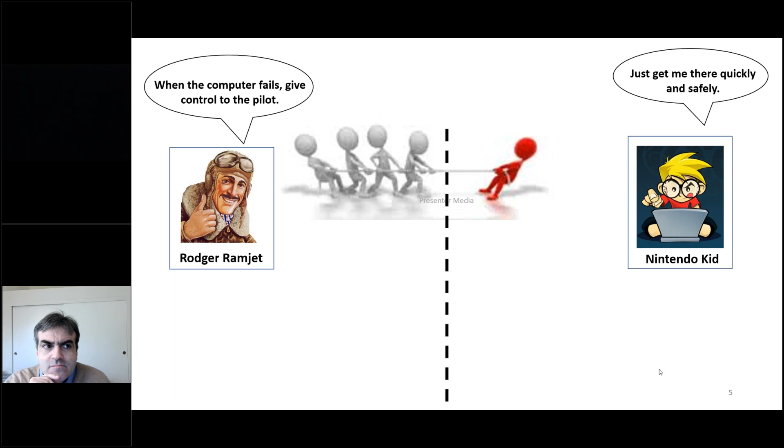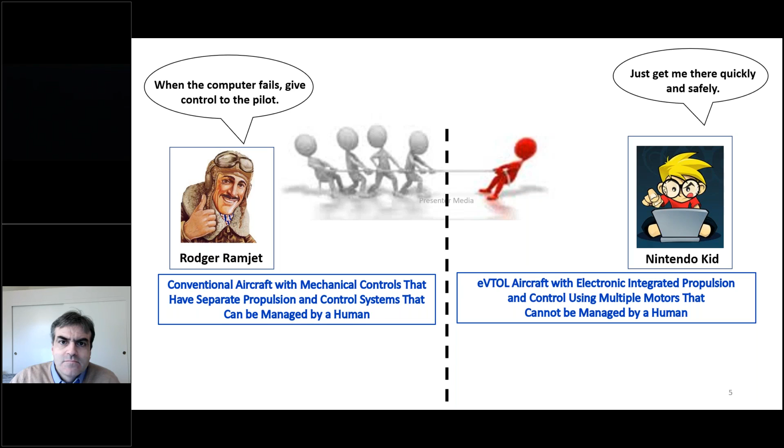Now, the Rodger Ramjet aircraft has mechanical controls, or fly-by-wire controls that mimic mechanical controls. There are basically separate propulsion and control systems that are managed by Rodger. For the Nintendo kid, we're talking about a new set of aircraft that have integrated propulsion and controls. It could have multiple motors, rotors, etc. And more often than not, they just can't be managed by a human—there are just too many things to move.

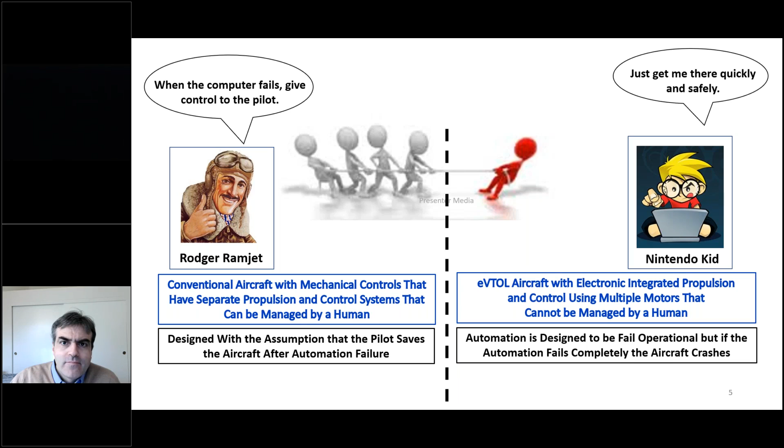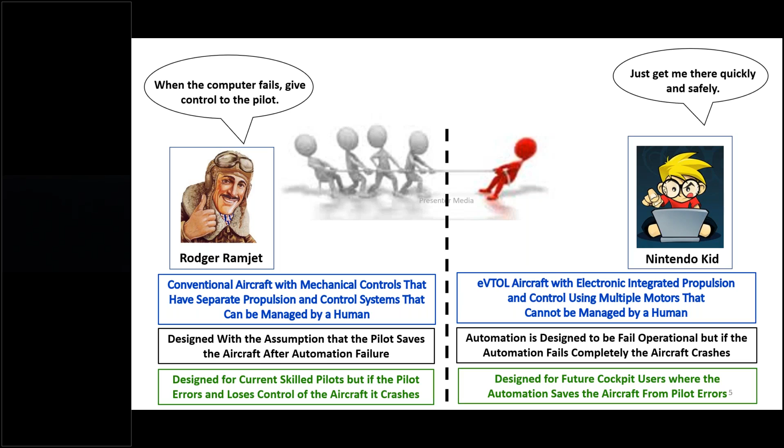In Rodger's aircraft, it's basically assumed that the pilot will save the aircraft after the automation fails. In the Nintendo kid aircraft, the automation is designed to fail operational. So if the automation fails completely, essentially the aircraft crashes. On the Rodger Ramjet side, if the pilot messes up, then the aircraft crashes. For the Nintendo kid, the aircraft features are designed so that the automation can save the aircraft from pilot errors.

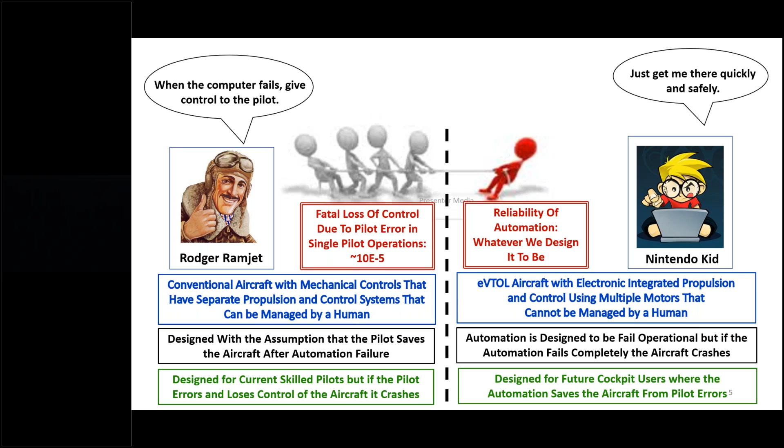One of the things we looked at was that in general aviation single pilot operations, the pilot has a failure rate of something worse than 10 to the minus 5th for loss of control accidents. On the automation side, we can design the automation to whatever we want it to be. It can be boiled down to basically a cost versus functionality relationship. So an interesting implication falls out of this if you think about it: if we want to improve safety beyond what a single pilot can provide, then we have to move past the philosophy that the pilot backs up the automation.

Al, one thing that I'm seeing on my screen is that I've got a green box. I'm not sure if it's cutting off the bottom of the slide or not. Is that a problem?

I think we can see everything. Okay, yeah, I can see everything. That's good. Okay, thank you.

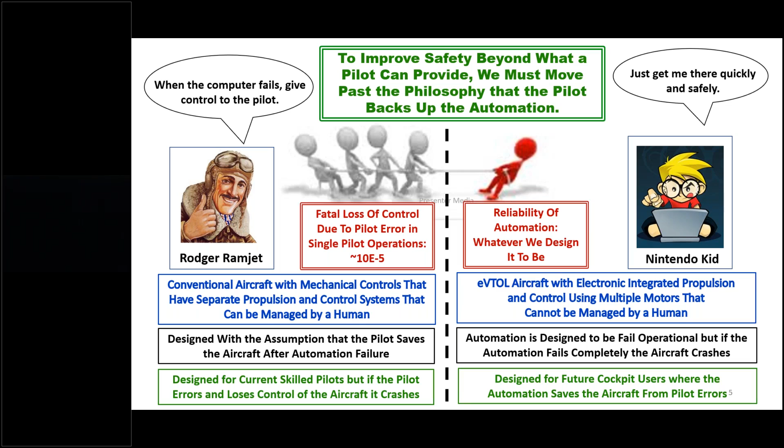Let's talk a little bit about the aircraft certification process. Historically, after an OEM has developed a new technology, they go to the FAA to get it certified, and typically that could happen under a special condition. It turns out that as this process is going on, the new technology has some new operational capability, and that's the purpose it was designed for in the first place. So then the FAA pilot certification side comes in and evaluates how this thing operates, how someone will learn how to operate it, and then is tasked with including it in pilot licensing.

Historically, the effect is that the pilot must learn both the existing manual operation and also the new automated version of how things work. Now, in the work that we're doing, we would like to literally change this, and this is a key concept that's at the very heart of our project.

Instead, what we'd like to do is turn this process upside down and start with the desired operational capability and the desired pilot interface. That will then determine what the aircraft certification requirements are, instead of vice versa. The effect is that we end up with simplified vehicle operations through standardized automation and the potential to eliminate certain manual tasks. Eliminating manual tasks is a key here in our concepts and proposals.

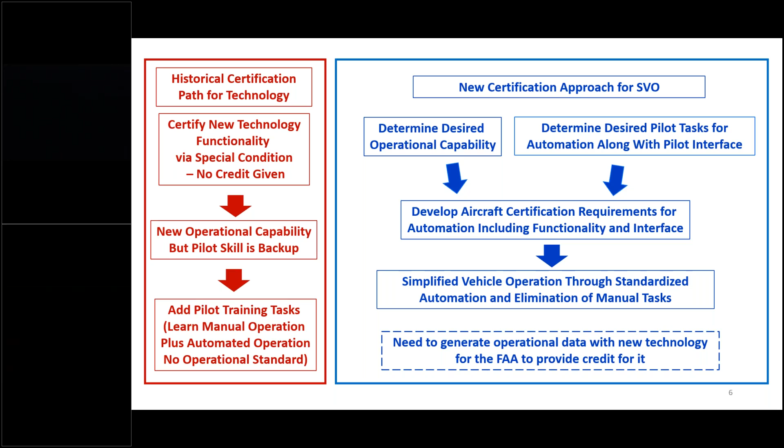So this feeds into the existing safety philosophy, if you will. Currently, we have power plants and flight controls, which are governed by design requirements. For example, flight control cables need to be made of stainless steel.

However, some of the systems and instrumentation are governed by a different philosophy. The gist is that we basically determine the severity of the failure, and that determines the probability of failure. After failure, it's assumed that the pilot will always do the right thing. So we see that systems are designed with the assumption that the pilot is the backup, and system and reliability levels are then currently set based on the number of passengers in the aircraft.

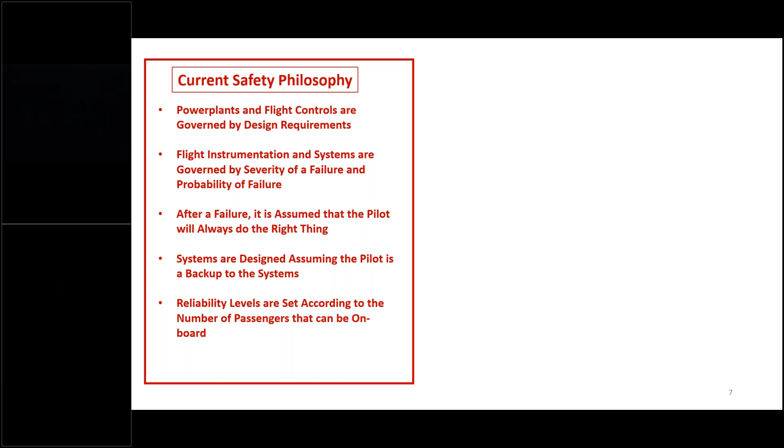We would also like to change the system so that all systems, including power plants and controls, will be governed by the effect of the failure and the probability of failure, not the design requirements.

So this has some interesting implications. One, the designer is free to come up with new designs that could improve safety, reliability, economics, etc., without being tied to the design requirements themselves.

Now, in the past presentation, I mentioned that single pilot operations in GA have a failure rate of something worse than 10 to the minus fifth for the pilot. So we expect that the pilot's failure rate will also be included in the safety analysis.

We recognize that in emergency situations, this pilot error probably gets even higher. So one of the things we're recommending to mandate is that any single pilot error cannot cause a catastrophic event. And also importantly, after a failure, no immediate action is required for continued safe flight.

Basically, we're proposing to get the pilot's adrenaline level down to a level where the pilot can think safely and logically. We're also recommending that the pilot is not automatically considered an acceptable backup, and that goes back to the safety analysis by including the pilot's failure rate.

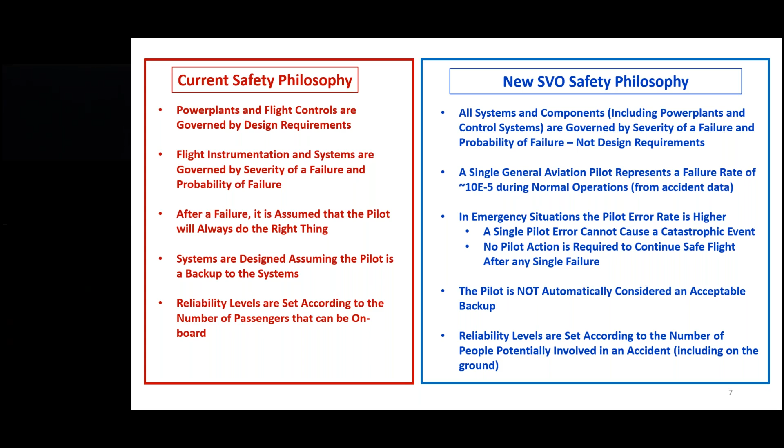So then the reliability levels are set according to the number of people overall involved in the accident, not just the people occupying the aircraft.

So the task we've taken on is how can we create a path from basically where we're at here to where we want to go. Where we are here is, well, today's aircraft, like Cessna 182s, Cirruses, etc. And where we assume NASA and the AAM offices want to go is nearly fully autonomous aircraft operations. So we've created this path defined by a couple of stepping stones.

The overall philosophy is this crawl, walk, run thing that you've seen before, and there's a couple of stepping stones. Stepping stone number one is SVO1, and it's basically targeting current fixed wing pilots. It has unified flight controls, so it operates like an aircraft in cruise and operates much simpler in hover than a conventional helicopter does.

Some other noticeable things: it has a typical glass cockpit, so it looks a lot like an airplane to existing pilots, except that it hovers much easier than a helicopter does. As all of you know, it takes considerable training and effort to learn how to hover a helicopter. The other things included in the list are added because they represent heavy training burdens in the pilot training curriculum we've looked at for both fixed wing and helicopter folks.

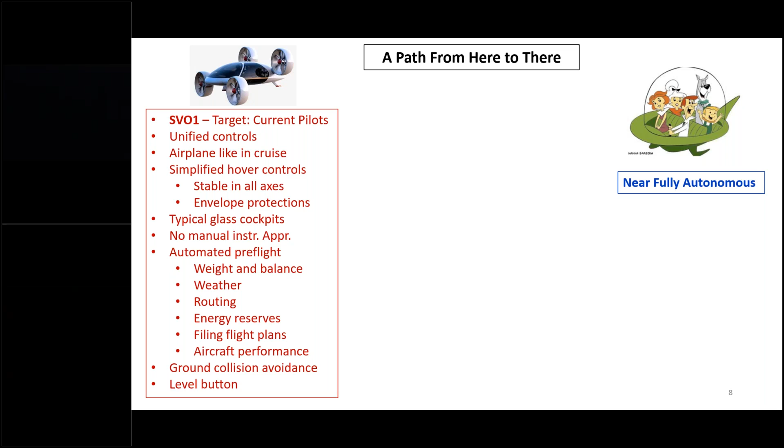The second stepping stone is what we've called SVO2, and here the target is a little different. The target is non-pilots. It has even simpler controls. It basically starts out assuming this group of people has no aircraft experience, but they do have about 1 to 2 weeks to become a pilot. In other words, the equivalent time and cost of going to truck driving school and becoming a truck driver. In SVO2, however, we're not tied by typical airplane controls. It has controls that are identical in all phases of flight, in cruise and in hover. The displays and controls are all integrated, as are the systems, and there are a lot of automated features.

The last stepping stone we've put in so far is SVO3, and SVO3 is really aimed at the passenger, with more of a point-and-click type of control. The passenger basically designates the destination and has nearly fully autonomous operations. A key point here is that, in this concept, there's no pilot license requirement. We'll talk about some of the interesting implications that come out of that in a few slides.

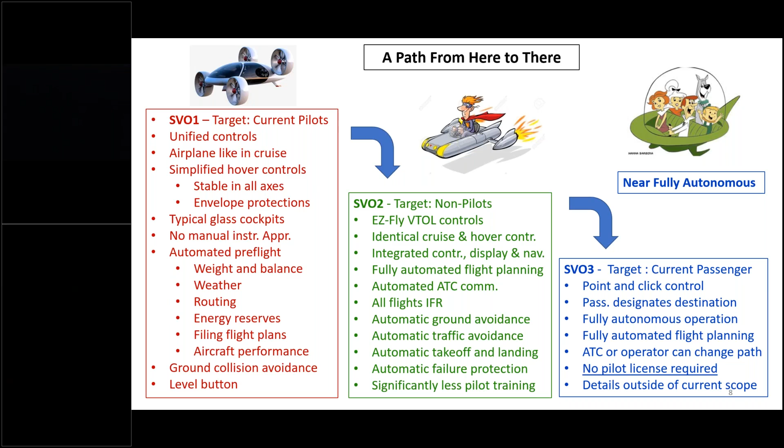Okay, so how do we make this change happen? Well, we can make it happen through the aircraft certification and pilot certification processes, which has basically been the majority of our involvement in this project.

So here's where we're at today. The certification process today is defined by FAR Part 1, which includes all the definitions. This defines airplane, rotorcraft, powered lift, etc. If you look at the left-hand side of the slide, you can see that the aircraft on the upper left side has airplanes, defined by Part 23, rotorcraft under Part 27, and powered lift. These come straight out of FAR Part 1.

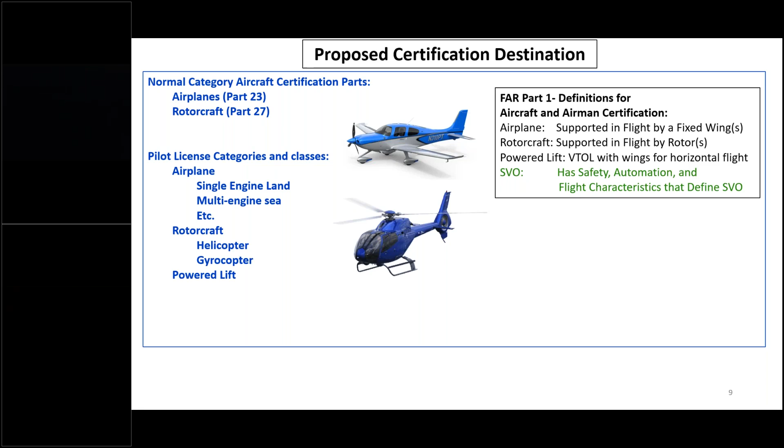A couple of slides ago, we talked about how we generate pilot licenses based on the hardware. Pilot license categories, of course, follow the same path that aircraft certification parts do. So we have airplane, rotorcraft, powered lift, etc. What we're proposing to create is an additional definition, which is SVO. We define SVO as something that has safety, automation, and flight characteristics defined in SVO.

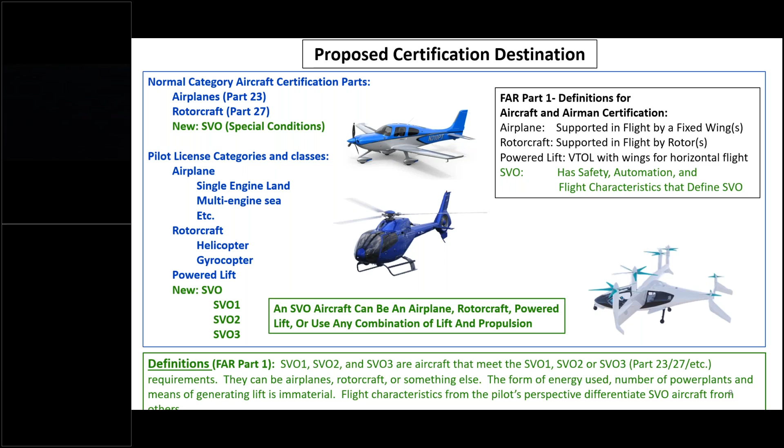Okay, so something that's come up in a lot of these presentations is how do we manage this certification change while OEMs are currently in the certification process themselves. We have airplanes and rotorcraft obviously being certified with the current system, and the current system is stable. But we now have a lot of new designs based on new technology that innovators have and are creating, and many of these philosophies and design changes could be at conflict with current regulations or even traditional regulatory philosophies.

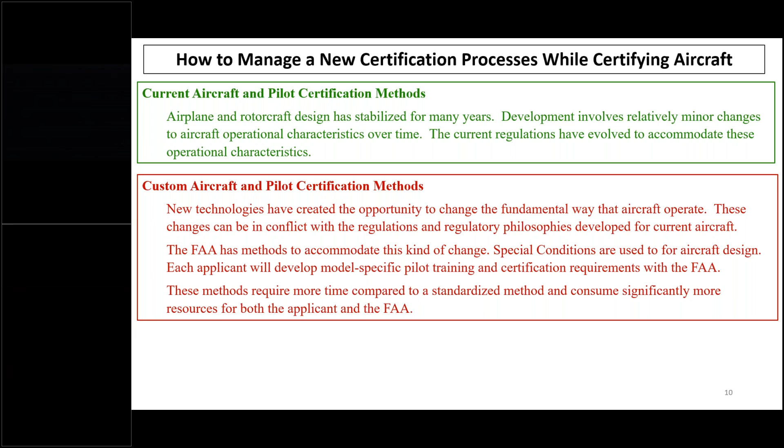Fortunately, the FAA has methods to accommodate this, and of course there are special conditions for aircraft design. For example, the GAMA Group, the General Aviation Manufacturers Association, has proposed to the FAA that applicants could develop model-specific training for pilot certification requirements with the FAA. Now, the unfortunate effect is that this tends to make the requirements custom for each individual aircraft, so unfortunately they require much more time to certify and develop than a standard method of certification.

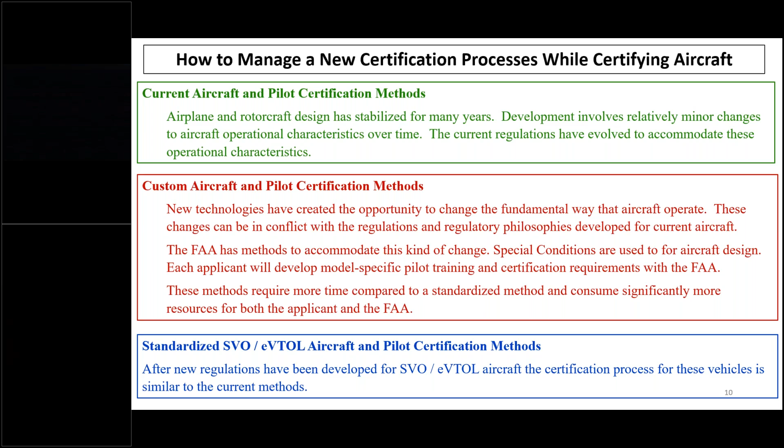The goal here is to create a standardized way of certifying SVO eVTOL aircraft using new technologies or making new technologies viable, creating a standard path so that when an OEM goes down a standard path instead of having a customized certification each and every time. Just to graphically show how this could work, we have a couple of bars in this slide. There's the upper green bar, which shows the current way, and that's the way that most aircraft are certified today.

The next one is the red bar. The red bar shows that the FAA is getting more and more custom certifications with special conditions, things of that nature. We expect that probably many more certifications will follow that path. As Al mentioned, there are several hundred OEMs working on these types of vehicles. The goal of our project, though, is to develop the blue path - a standardized way of developing SVO and fly-by-wire eVTOL aircraft that doesn't conflict with the folks in the current pipeline. So if there's a standardized way of certifying these machines, the expectation is that as the standardization develops, more aircraft will use a standardized method and fewer would use the customized method.

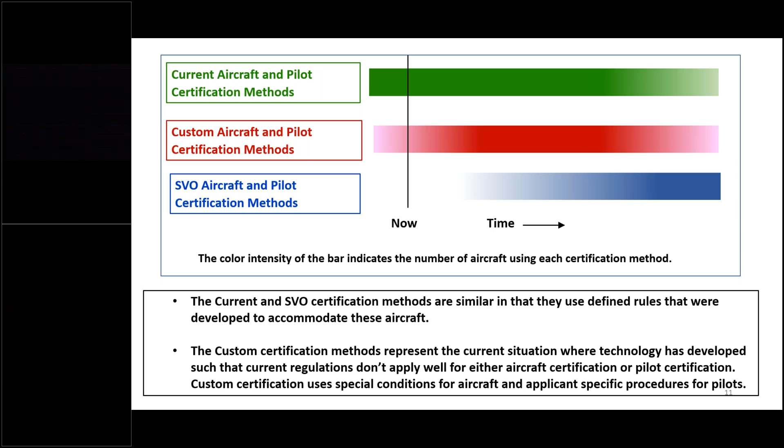Okay, just to recap this general philosophy - here's basically the stepping stone general philosophy. SVO1 leverages current fixed-wing pilots. We want to significantly reduce the burden for VTOL aircraft and improve the reliability of automation so we can eliminate some of these heavy training burdens and certification tasks for pilots. As a reminder, we believe that we need to use data from existing operations with automation to get this type of certification. We believe that this is a UAM, AAM industry enabler.

SVO2 is designed for pilots with no previous experience, where they basically command the flight path. We focus there on navigating, not maneuvering or providing stability. For example, most pre-flight planning is done automatically. This allows the UAM, AAM industry to rapidly grow by supplying operators to much larger traffic volumes.

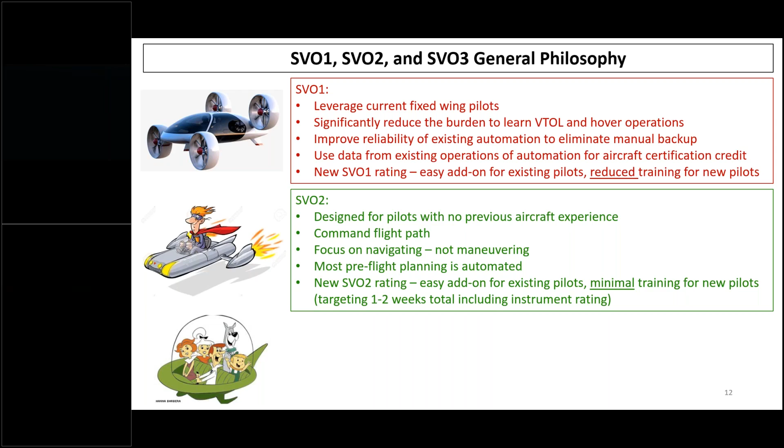And finally, SVO3. SVO3 is envisioned as point and click control with fully automated planning, allowing ATC or the fleet operator to change the destination or routing. SVO3 has some very interesting implications because we're suggesting that no pilot license is required. This is interesting because throughout the FARs, you can see the concept time and time again that the pilot is the ultimate authority for safety and has responsibility for safety as well.

Now, if we don't require a pilot's license, then it's not reasonable to expect the pilot to have the responsibility for safety. So safety must be realized somewhere else. The only real place that makes sense for that to rest is on the operating organization. So the implication here is that SVO3 really works only as part of a Part 135 or Part 121 operation in a controlled environment. Now that's a big change for FAA certification philosophy - that the pilot is not the ultimate authority, that someone else is.

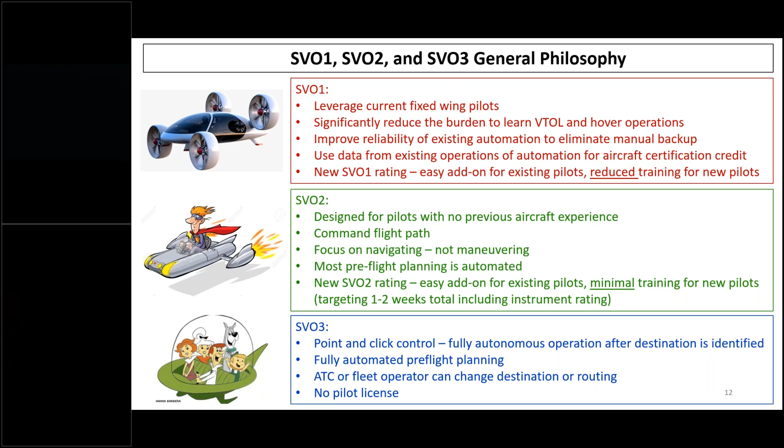So now in the next few slides, we'd like to transition a little bit into some of the previous work that we have done that relates specifically to some flight test examples. I'd like to transition over to Noel Duerksen for the next couple of slides.

Thank you, Borja. Good job, by the way.

I'd like to talk a little bit about some of the history of how we got here. Of course, none of this happened just spontaneously - like everything else in technology and science, it builds on things that have happened in the past. So I would like to start with the upper left picture. That's a picture of an investigator at NASA Langley, Eric Stewart in particular. He did a lot of work in the 80s with NASA simulation and developed a flight control concept that he called EZ-Fly.

The EZ-Fly concept basically said that pilots aren't really interested in controlling the position of the elevator, the position of the ailerons, etc. What they're really interested in is controlling the direction of the flight path, including the magnitude of the flight path - basically a flight path vector command system. So that's what he developed in the simulation, and he found some really interesting results. Basically what he found was that non-pilots were capable of flying an instrument pattern and an ILS to about the ATP level of performance with very little or no training.

Back in the late 90s, I was fortunate enough to be working at Beech Aircraft Company with NASA, and we developed the AGATE program. Actually, NASA developed it, and I was fortunate to be involved. That's what the Bonanza in the middle is all about.

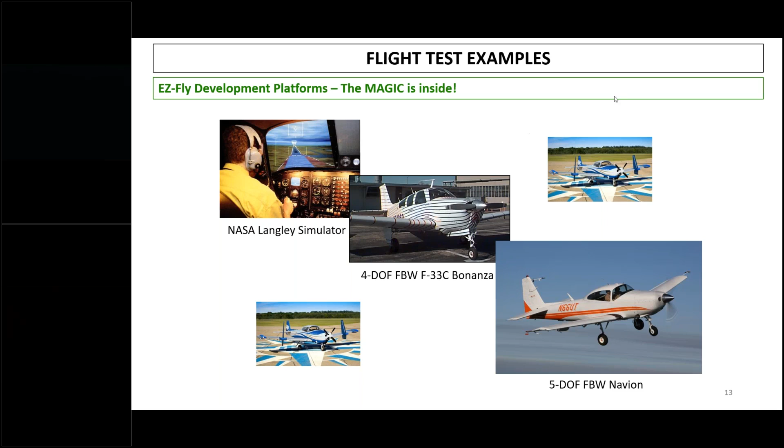This is an interesting story that comes out of the Bonanza. Borja will talk about some interesting stories from the Navion in a bit. But the Bonanza had the EZ-Fly control system, and as I mentioned, it controls the flight path vector. It also had envelope protections, so you couldn't stall the airplane, couldn't overbank it, couldn't over-G it, and couldn't run it into the ground.

One of the things the president of Beech Aircraft wanted to do is have me take him on a test flight to demonstrate this new technology we were developing with NASA. I agreed, but then thought it might be a good idea to have a practice run before flying with the president of my company.

So I walked into our office area and announced that I needed to do a practice demonstration. The requirements for the practice demonstratee are that you don't know how to fly an airplane, but you're comfortable flying in one. A young lady raised her hand - she was our tech writer. She had never flown an airplane before, but had flown in small airplanes. I said, you'll do, let's go.

We walked out to the ramp and I gave her a short briefing on how to open the door and things like that, put her in the left side of the airplane, the pilot side, where the fly-by-wire control system is. I emphasized that you cannot hurt this airplane, and once we get off the ground, you are going to be flying it. So that's exactly what we did.

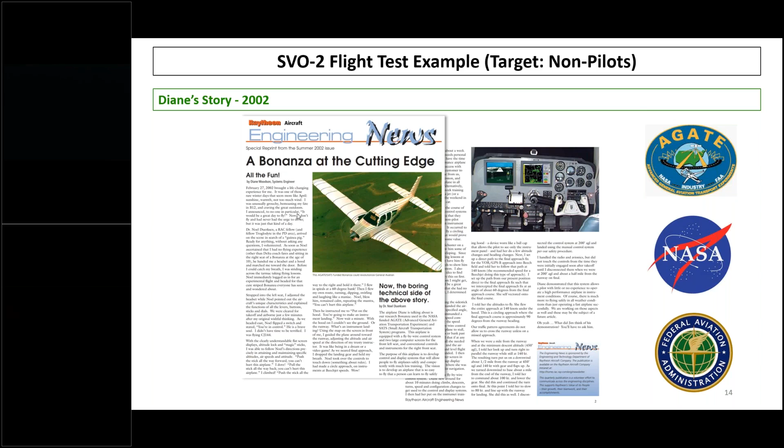We were able to take that software architecture and implement it with improvements in our variable stability Navion. It's a 5 degree of freedom in-flight simulator.

A couple of short stories here: one, the FAA was gracious enough to allow us to fly with one of its young engineers. This particular individual had basically no flying experience whatsoever. He was a civil engineer, but was very apprehensive to go flying with us at first. You can kind of see on the left side, I'm getting into the aircraft and Noel is in the back, kind of scratching his chin, figuring out how this flight's going to go.

And it actually progressed very well. Little by little, this gentleman felt more and more confident with the aircraft. He really started believing that he wasn't going to hurt the aircraft and that it wasn't going to hurt him, as we proceeded to do climbs, descents, turns, fast, slow, etc.

This was a very interesting flight because at the end of the flight, about 45 minutes in, I asked him to do a steep turn. Noel and I are both flight instructors, and it takes some effort to train folks to do a steep turn to within practical test standards.

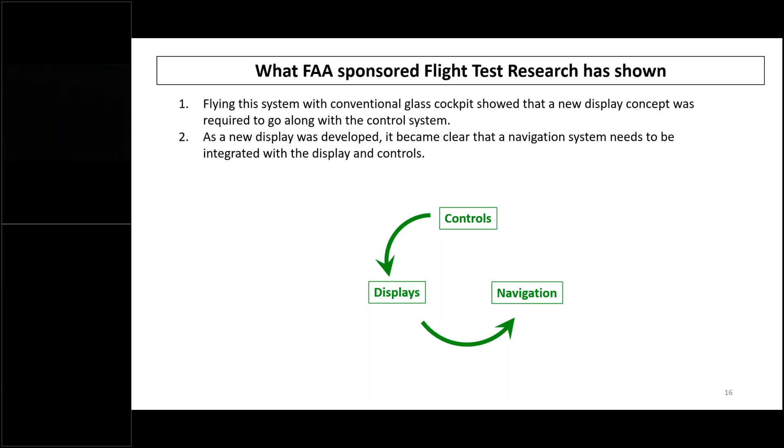It basically showed us several important things. One was that a new display concept was required to go along with the flight control system, and they needed to be developed together, not independently. Once we came across that, we realized the displays also needed a navigation system integrated with the displays and controls, because all three things affected one another. A change of the controls affected the displays and the navigation, and vice versa. They really couldn't be developed as independent boxes - they all affected one another. This came out of this research program.

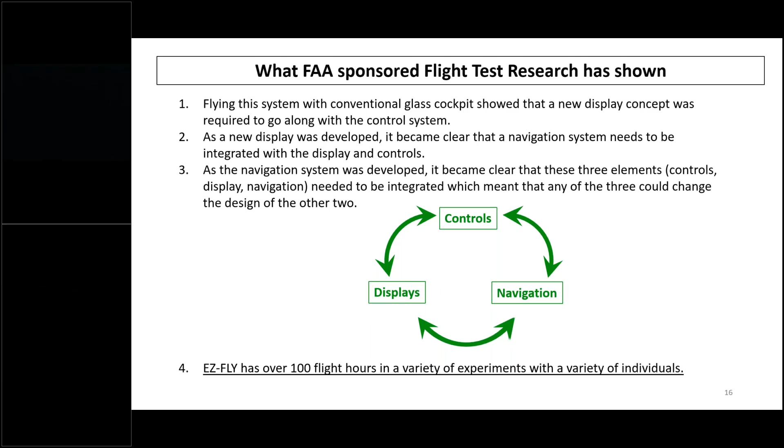The EZ-FLY system accumulated a little over 100 flight hours in a variety of experiments with a variety of individuals. Some of the key takeaways, again, were not necessarily these demonstrations, but some of these means and methods of compliance that we'll talk about in just a moment.

I think, Al, how much time do we have for this presentation? We can go at least till noon, but typically we'll go a little bit past that when there's interest, if people can hang on. So, okay, go for it.

Well, I've got a video here, but it's 7 minutes long. Maybe I could share this video after the fact if we have enough time. But, well, there you go, we can do that at the end. That'd be great. Yeah, we'll try to go through these slides, and then if time remains, we'll show you a demonstration of the system. But it is, again, about 7 minutes long.

So I'll skip this for now, and let me turn the time over again to Noel Duerksen.

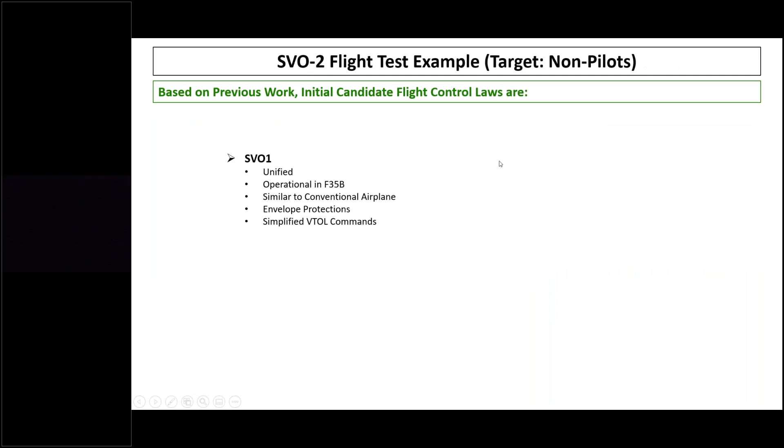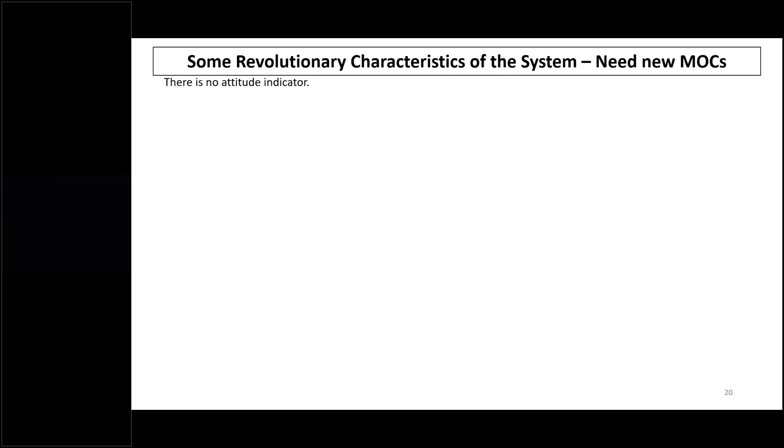One of the things that came out of this FAA-funded flight test work was not just these demonstrations, but the need for new means and methods of compliance, because some of these revolutionary characteristics of an SVO2-like system include, for example, there is no attitude indicator. So the flight controls take care of attitude. There's no flight director to show what attitude to fly because there's no attitude indicator.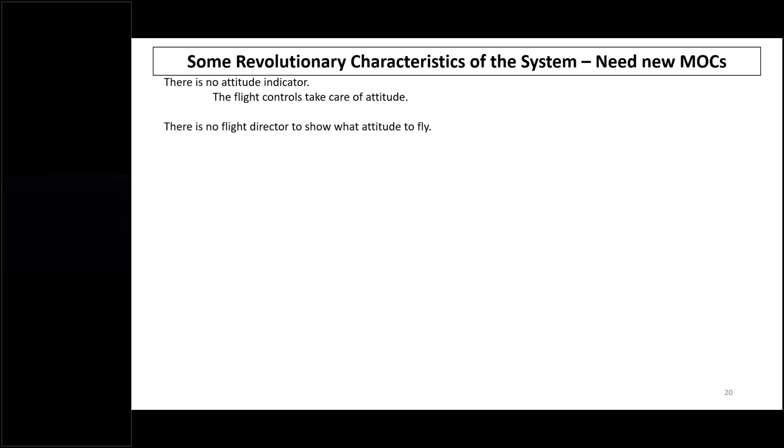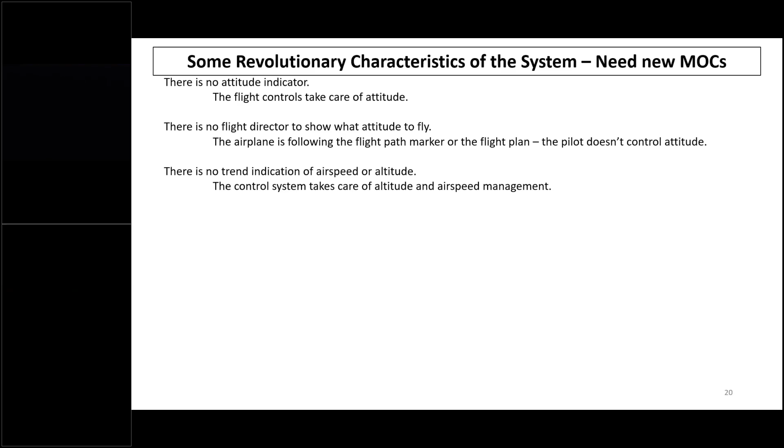So the airplane basically follows a flight path marker or the flight plan; the pilot does not control attitude like in a classical aircraft. There is no trend indication of airspeed or altitude in the displays because the control system takes care of altitude and airspeed management. There's also digital airspeed and altitude displays, just because ATC sometimes asks what speed or altitude you're at.

Another interesting thing that fell out of this is the pilot cannot go slower than the approach speed with less than full power when the lift fans are not engaged. At full power, the airplane will slow to no less than maximum climb speed. If you think about it, this implies that there's no stall speed, with implications for aircraft certification and airman certification.

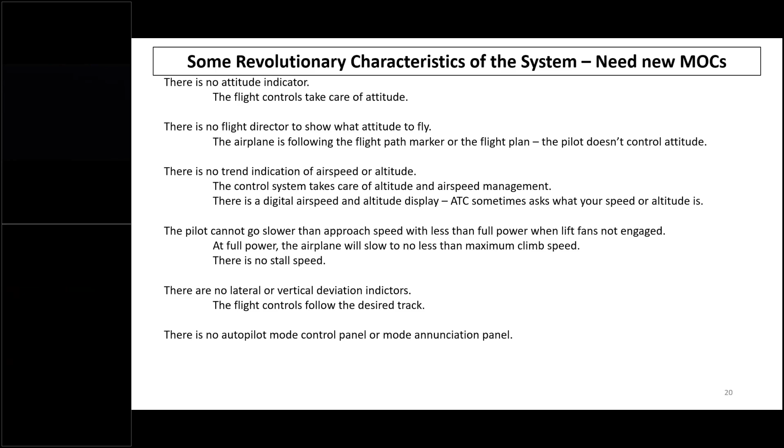Also, there are basically no lateral or vertical deviation indicators in the SVO2 concept with EasyFly, because the flight controls basically follow the desired track. Another interesting thing is that there isn't the traditional autopilot mode control or mode annunciation panel because there's no autopilot—the pilot does not select the modes. Also, there is no mechanical backup or direct mode. The system is assumed to have a reliability level sufficient for it to be always on.

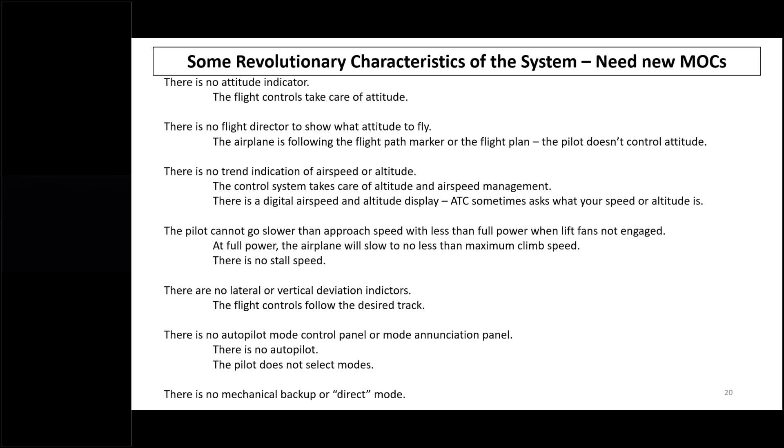So just to summarize some of these concepts we've talked about today, the fallout of this work was that it became an opportunity to generate new means and methods of compliance, because of improvements in low-cost electronics, the capabilities of fly-by-wire, the desire to reduce pilot error accidents, and the desire to reduce training costs. The work, again funded by the FAA, started this process and provided actionable data that I believe will be publicly available very soon.

Okay, so we want to go back out of the flight test phase and finish off with the NASA-funded work we talked about initially. We'll go back to that presentation and summarize a certification path, if you will. First, we recognize where we are again today: we're not going to get another rewrite of Part 23 in the foreseeable future.

We've already had that fairly recently, and the special conditions that we currently have are unique to basically every eVTOL and SVO design, so that requires individual model-specific training for each new design.

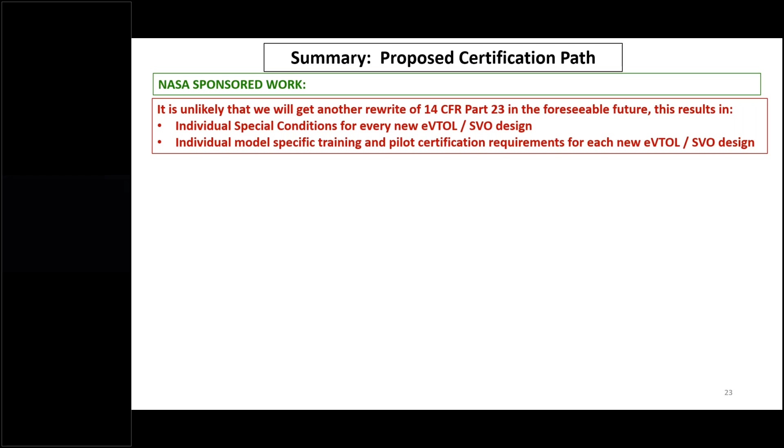What we would like to do is create this proposed certification path. Step one is to create a generic set of special conditions by collecting many of the conditions being applied today to eVTOLs and SVO, or that are being proposed, and collect those together. This will basically create a standard by which companies can expect to bring the certification, instead of having to negotiate from scratch for each new design.

We also expect to create a minimum set of automated functions that could be lumped together in an SVO1, 2, or 3 package, and propose that set of standardized automation packages to affect the pilot knowledge and skills required for licensing. The effect then could be that current airman certifications can be used, resulting in a normal license with restrictions to limit operations to SVO with certain packages, kind of like the centerline thrust restriction used today for multi-engine ratings.

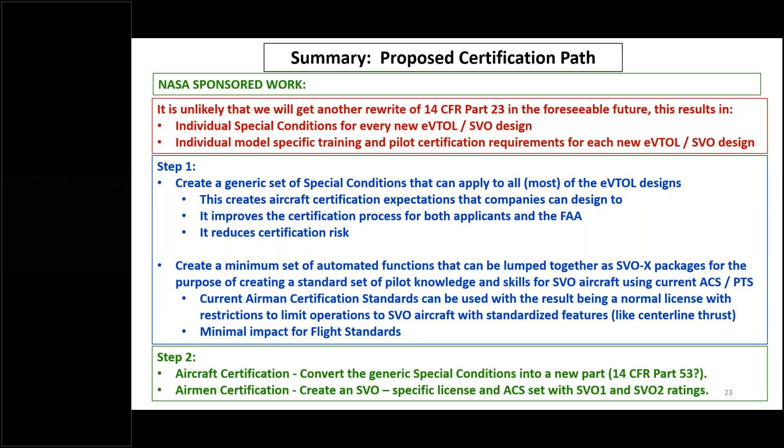Additionally, we want to convert those generic special conditions in the future into a new part and create a license from those standardized features, which can form an airman certification standard for SVO1 and SVO2. But because of the federal effort required to create a new part, it's much more likely these would be lumped together into a set of proposed SVO special conditions for Part 23 aircraft or Part 27, etc. Now, just to close this out, we have one more slide to go.

We report to our sponsor NASA, and to the FAA and our industry advisory team, every quarter. I'd like to briefly go through some of the changes we've made since our last report. That last report a few months ago was about 80 pages long; we're now over 200 pages.

We've created a complete draft for a new proposed Part 53 with SVO1 and SVO2 special conditions for Part 23. We've also created a separate set of reliability requirements, which pulls in the concept that power plants and controls are governed by probability of failure and the effect of the failure, as opposed to design requirements like we talked about before. We've created two sets of reliability requirements: one for commercial operations over densely populated areas, and the other which is basically what we have today. The densely populated areas requirements are patterned closely after Category A of Part 27 and Part 29 that Europe uses today.

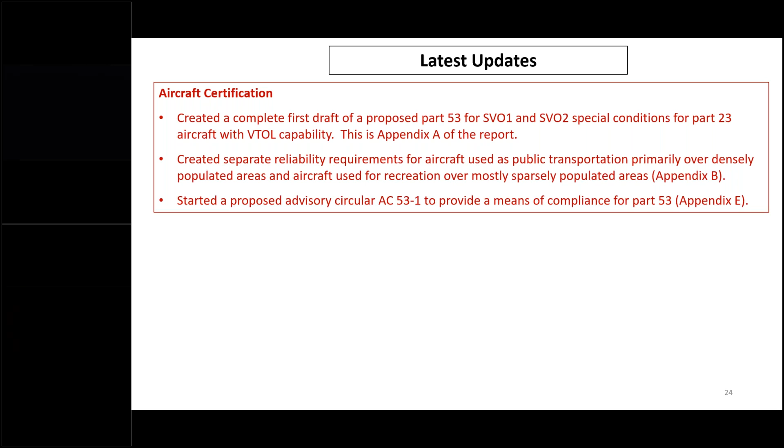We've also started a proposed advisory circular to provide a means of compliance that we've developed, both on the aircraft side and the airman certification side. We've acknowledged industry proposals by GAMA and others to the FAA for specific model training in the short term, and we've proposed additions to Part 61 for SVO1 and SVO2 for all the pilot types listed in Part 61. Lastly, we've started looking at operational rules.

Some examples include Part 91.205, which lists the instrumentation requirements for IFR flight. That doesn't make a lot of sense for some of these things, especially when you look at SVO2, where the flight controls provide attitude stabilization automatically. So the display of attitude is really not required. We've looked at those kinds of things and expect many more changes to follow.

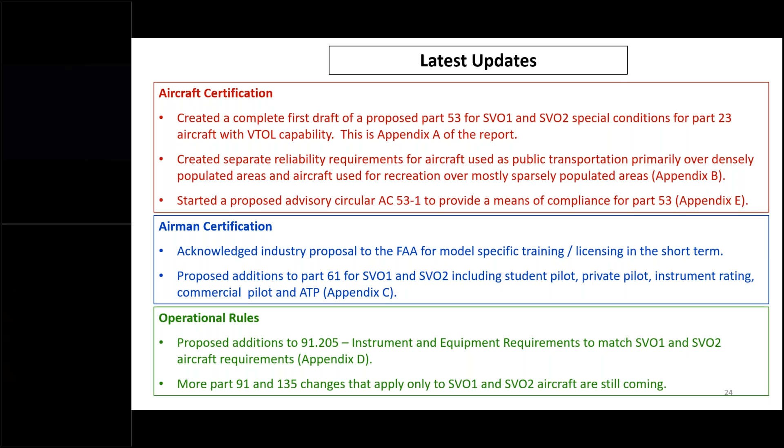So with that, we'd like to wrap up the presentation, and I'll turn the time over to Noel, and we'd like to open it up for questions and answers if we have a few minutes left, Al.

Yeah, we do. You're going to give me the rotten tomatoes. Oh, sorry, hold on, there they come. Got them, thanks. You said rotten tomatoes, I figured we'd throw some. Go ahead, ready for questions. I'll go ahead and start it up. I'll warm up.

So the unified theory that you presented sounds great, and Easy Fly sounds great. But what you showed us was that SVO1 uses one kind of inceptor mechanization, and then you switch hands and so forth for SVO2. Why both? Why not pick a winner and just go with one?

The reason for that is we believe that in order to get to the end state, which is what NASA defines as a nearly or fully autonomous aircraft, we need to create a path to get there. So we've created stepping stones that define that path. Where we are today is the jumping off point: conventional airplanes and conventional helicopters with conventional FMSs and conventional cockpit instrumentation. Stepping stone one is a unified control system.

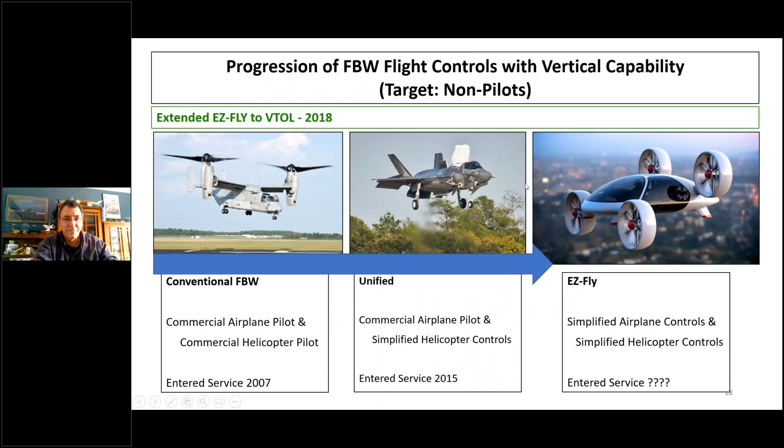Okay, so I guess for the record, since this is being recorded, this is a video that was produced as part of an FAA-sponsored research project by the Small Aircraft Directorate, and I guess it's the Policy and Innovation Division. Our chief technical point of contact was David Zizo. This basically shows what we do in flight, but we cut this video on the ground to be able to make the video editing processing easier. Here goes.

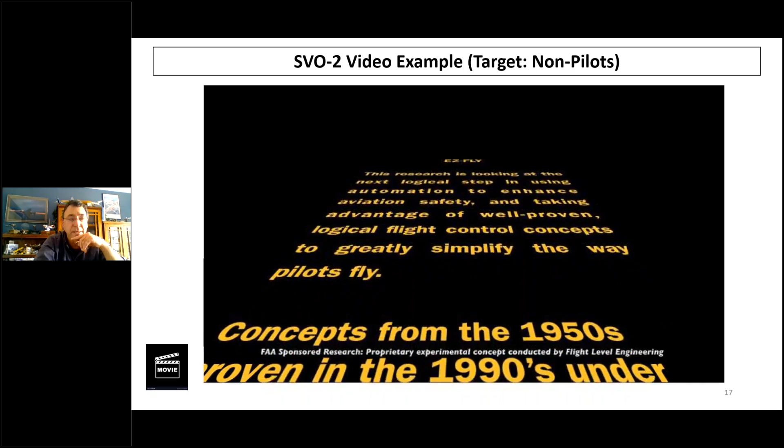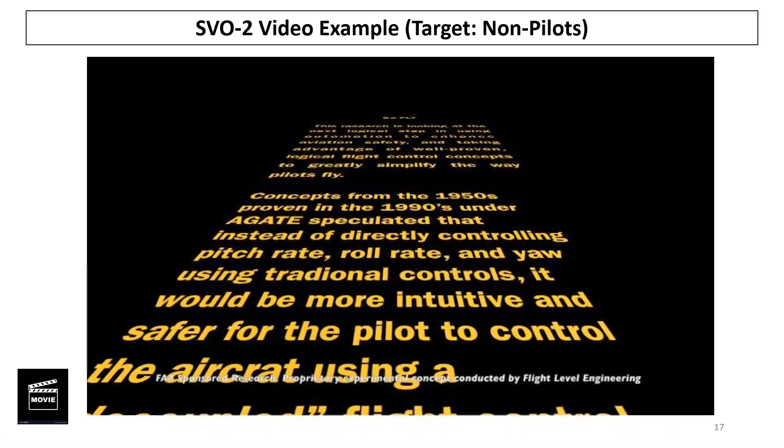At the time, the control technology and hardware was too expensive to be affordable to the community that needed it most: personal general aviation. Recent advances in non-aviation consumer technology have made the hardware and software needed to implement these augmented flight path control concepts affordable and accessible enough that they can be implemented safely and at a cost affordable for general aviation.

These concepts are also a key enabler along the path towards transformational flight vehicles for an urban air mobility industry, where pilot workload is envisioned to be methodically reduced to the point of just having passengers riding along in a future air taxi system.

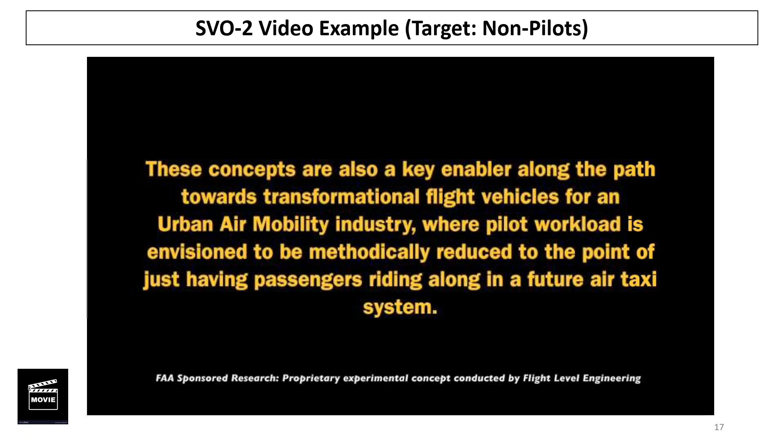This research project allows us to get real-world experience with pilots flying the technology, which leads to identification of safety requirements and methods of compliance that can be applied when these types of controls are proposed for certification by applicants with new vehicle concepts.

Let's start with a tour of the cockpit. This aircraft is a flight controls testbed for general aviation aircraft. The left seat is used by the evaluation pilot and the right seat is used by the safety pilot. The right side of the cockpit has standard controls and displays for safety purposes. The top display indicates whether the evaluation system is engaged or not.

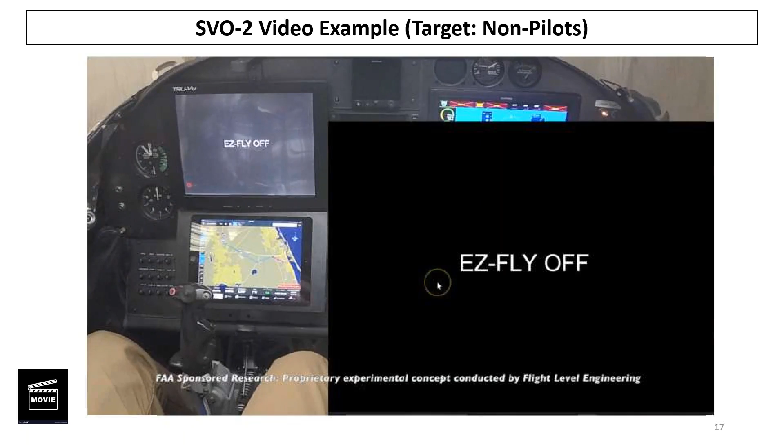When it's not engaged, it says 'easy fly off.' When it is engaged, it shows where you're going from the pilot's point of view, even if there are clouds obscuring the view.

This display shows the flight path marker. This is where you are going. Obstacles, runways, and other items of interest to the pilots. The bottom display shows a moving map. Both displays are touchscreen. There is also a center stick.

The position of the center stick relative to the spring center location commands vertical flight path angle and turn rates. This type of control system is called a velocity vector command system, since the position of the stick directly commands the direction of the velocity vector.

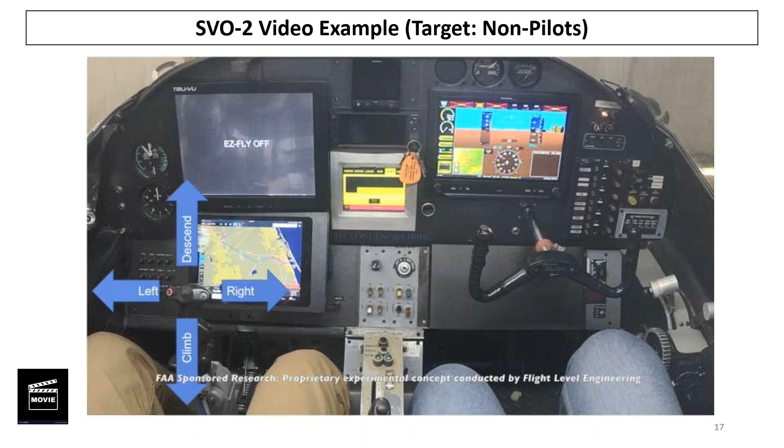With this system, you move the stick to directly command the aircraft's direction of flight. In a conventional airplane, moving the stick commands a control surface position, which changes the aircraft's attitude, which in turn changes the direction of flight.

Fore and aft motion of the stick commands vertical flight path angle, resulting in the airplane climbing or descending. Returning the stick to the center position will result in the aircraft holding its current altitude.

For long climbs and descents, push and release the lock button, which is the black button on the side of the stick. The stick will remain in this position. To unlock the stick, press the button again, or overpower the lock and move the stick from the lock position.

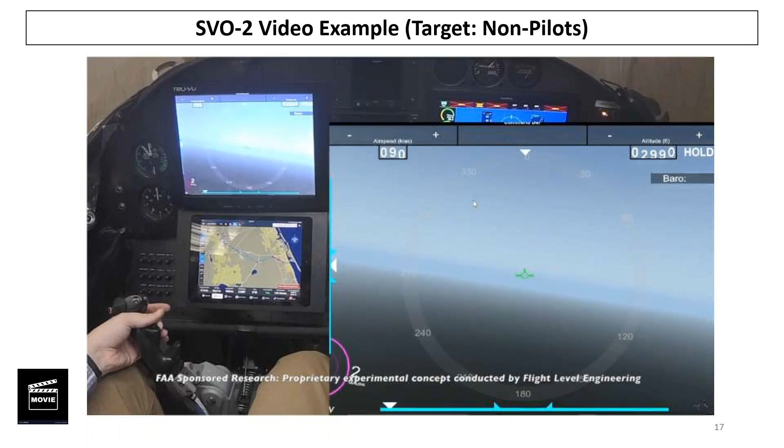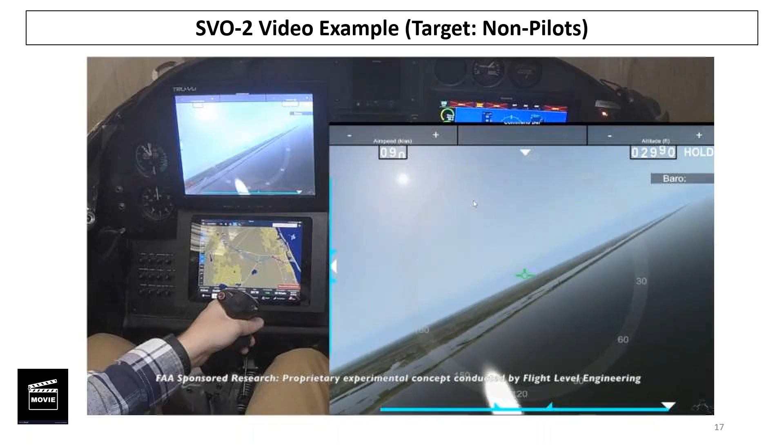Left and right motion of the stick commands turn rate. Centering the stick will result in the aircraft holding its current course.

A maximum of 45 degrees of bank is allowed at high speeds. Maximum bank angle is reduced as speed is reduced to prevent accelerated stalls.

The flight path marker is placed on a point and the aircraft will fly to that point. The position of the speed command controller commands airspeed. The minimum commandable speed is landing approach speed, and the maximum commandable speed is the aircraft's limit minus 10 knots.

This is the basic manual operation of the system. There is no way to override this and directly control the elevator, ailerons, or rudder surface, or the throttle valve like a conventional airplane.

The system has many built-in protections. These include angle of attack limiting to prevent stalls, G-loading, bank, pitch, overspeed, ground collision protection, and automatic level flight.

To demonstrate some of these protections, we will start from level flight and hold the stick full aft and full left. The aircraft starts a climbing left turn with an initial bank angle of 45 degrees. As the aircraft climbs, the power goes to full and the airplane slows. As the airplane slows, the bank angle is reduced.